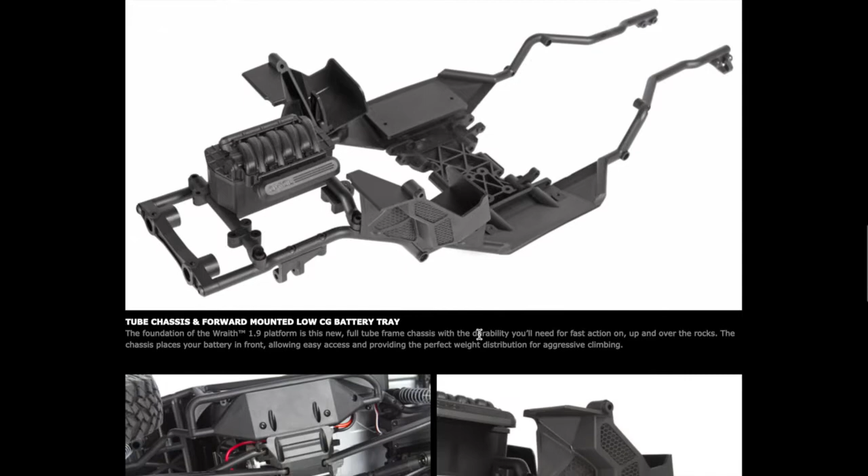How similar that is to the Wraith 2.2, please do have your say on here. I'm going to say something's new and it not be on here, so as I say, I'm not overly familiar with the platform, seen down at JJ Customs. This does appear new though, skid plate and boat sides. Refining a successful Wraith 2.2 design, increase the ground clearance by reducing the size of the skid plate and lower rails. Boat sides.

I guess this fits the meaning on here. So that's going to increase the handling on rough terrain, I guess, by stuff not getting caught as much underneath the car. Protective inner fender wells - are they new to the car? Please do have your say in the comment section below the video.

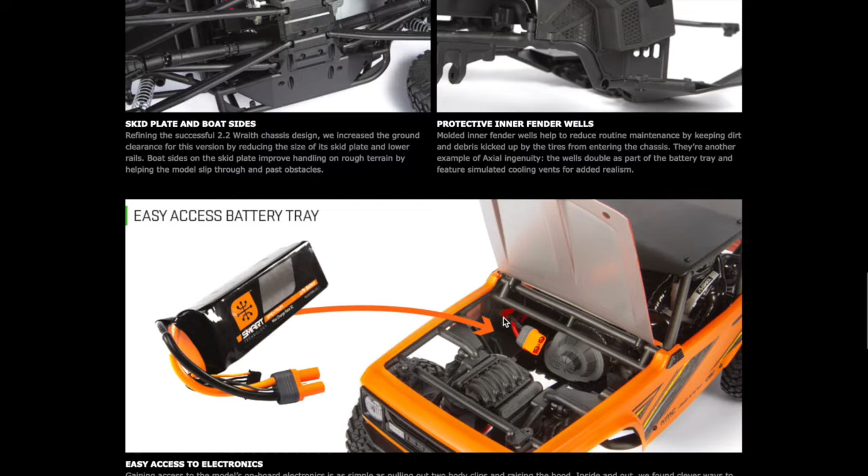What have you got here? Easy access battery tray. Now I have no idea if that was a big problem on the Wraith 2.2, do shout out if it was. Okay, looks quite nice. So for that you can open the hood there just like a real car, and then there we've got a real semi-scale engine in there.

So the battery's going to tuck in there fairly easily, I would guess, from accessing it. It can be a bit of a pain - one of the Axial crawlers I had was a devil of a job to get the battery in and out of there. Adjustable battery tray.

New tray is now relocated lower and further forward for better weight distribution. Can accommodate batteries up to 5000 mAh 3S packs on their site, so I'm guessing you're going to be getting upwards of an hour's crawling with one of those fitted.

Scale accessories, 2 detailed turbochargers, add them under the hood for realism. Okay, and one thing we have got, I did notice straight away in there, is it comes with 5mm LEDs already installed in the front. Moulded plastic grille and radiator, again for adding to realism, and the lights enable you to run at night.

Just scan on down here. Okay, now we've not got beadlock wheels. Some people may have an issue with that at this price point, particularly as lesser cars, or one might think lesser cars, like the Red Cat Gen 8 coming to market straight away with beadlock wheels. Okay, I have no idea at all on these tyres guys. Are these Nitto Trail Grappler tyres any good or not?

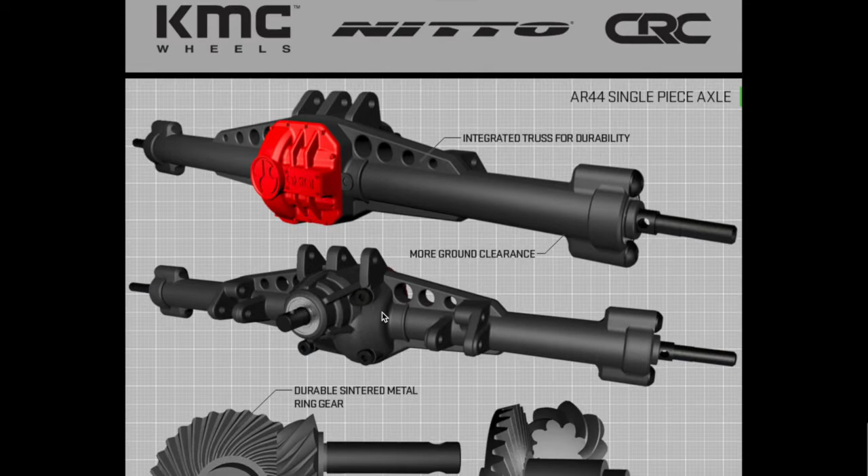AR44 single piece axle. I believe this is common to other models in the Axial range.

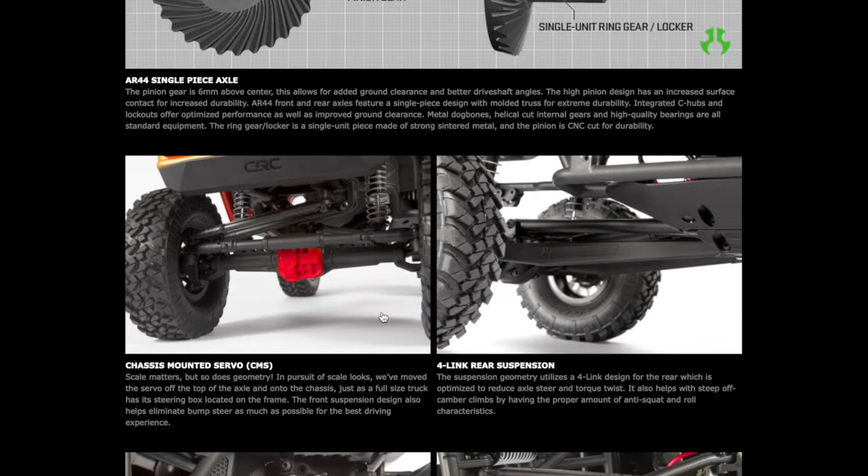Chassis mounted servo. Scale matters, so not just in scale but in geometry. In pursuit of scale looks, they've moved the servo off of the axle and onto the chassis, just as a real life truck would do.

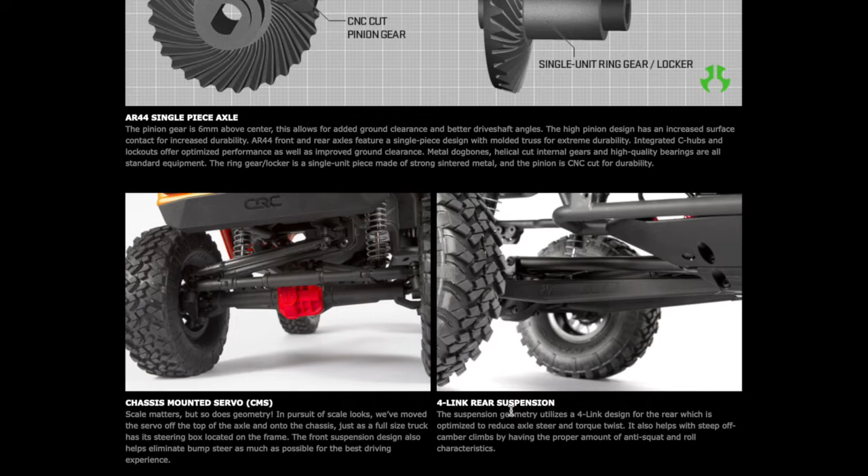Four-link rear suspension, I'm assuming that is fairly similar to the existing Wraith 2.2. Things like the adjustable coilover shocks and these Wildboar driveshafts - anybody out there tell me and others whether these are the same as on the Wraith 2.2.

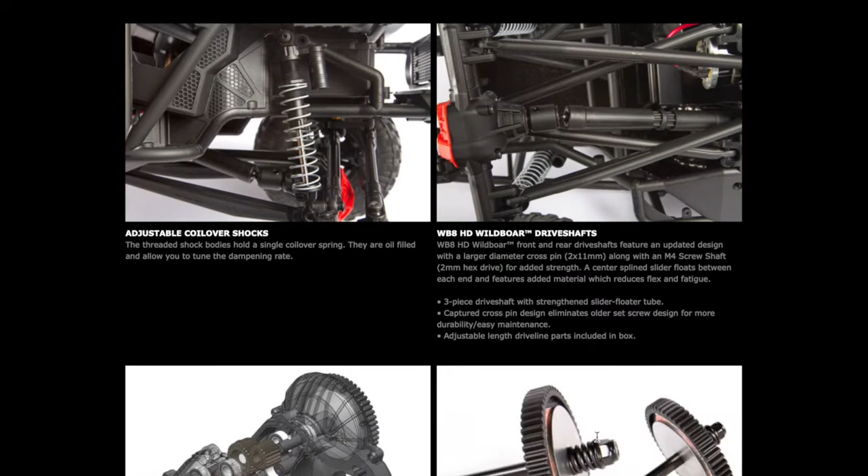Do fire away. Dual slipper clutch, AX10 transmission, I guess that's common with the original SCX10. Final drive ratio is higher.

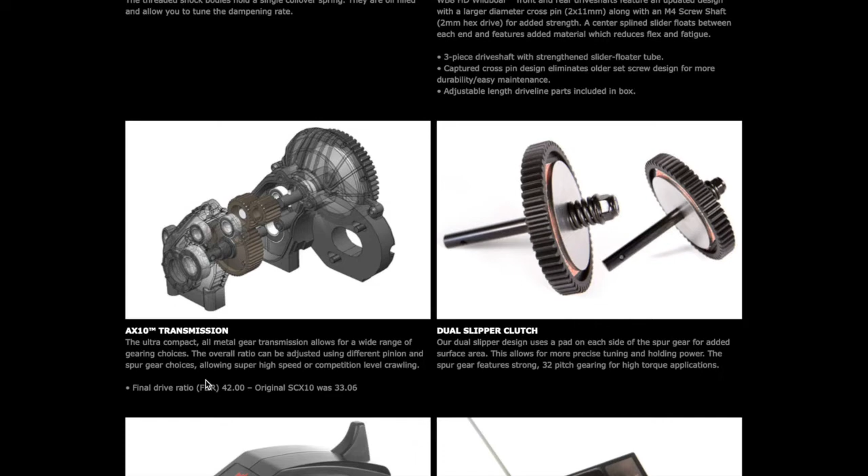Now, I have no idea, does that mean the thing's faster than the SCX10 or is it slower? Do have your say below.

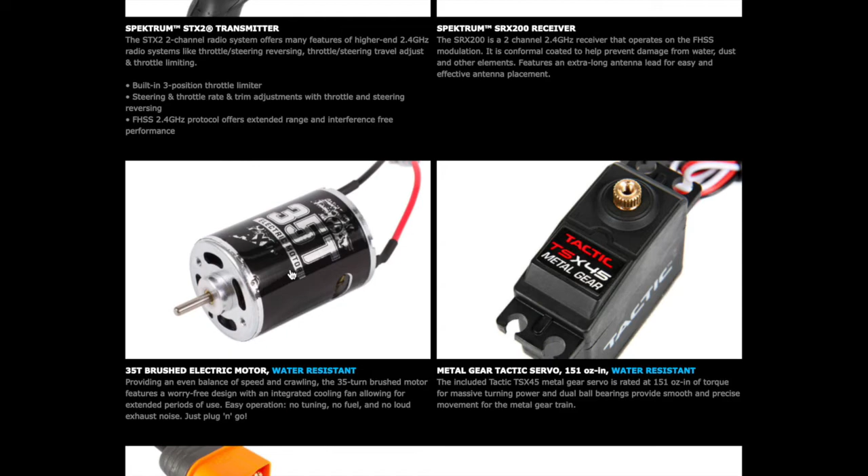A Spektrum transmitter and receiver as the running gear, fairly reliable stuff on here. 35-turn brushed electric motor, so that's going to give you bags of torque with this thing on it.

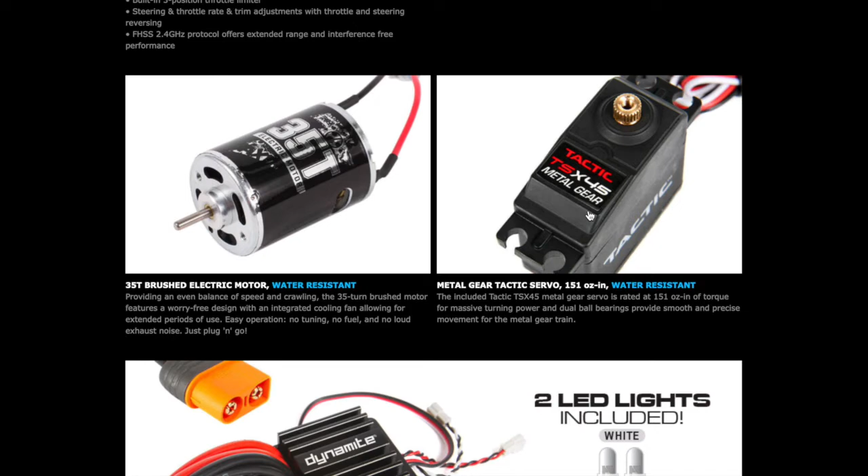Okay, waterproof metal geared servo on it, dual ball bearings. Tactic ones are normally pretty reliable. And I have started taking my radio gear apart and using a conformal coating inside just to be on the safe side. Dynamite AE-5L with drag brake, quite a good ESC.

I have used these on a couple of my older Axial crawlers before, but I've not got any Axial crawlers in my fleet at the minute.

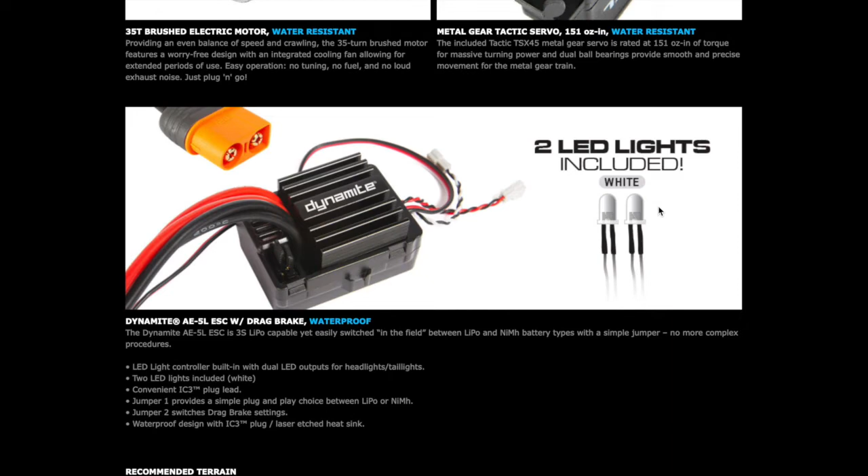So 2 LED lights for powering the lights on the front of the car. Okay, additional items required: battery charger and AA batteries, but it is classed as RTR.

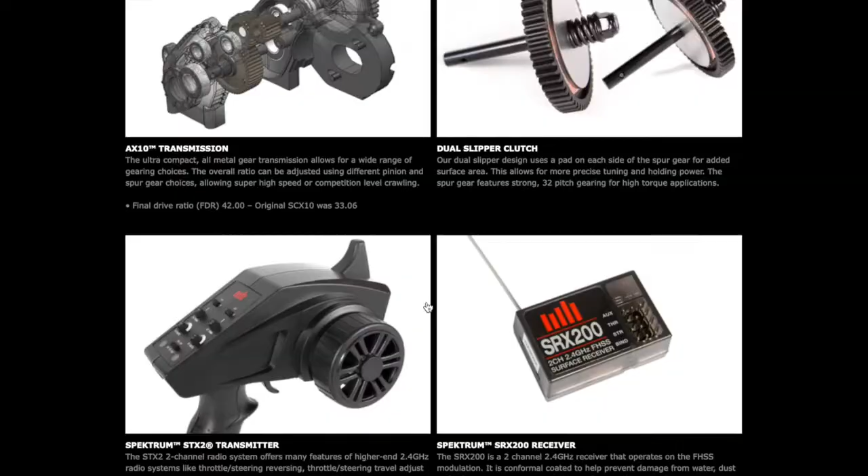So, tell me your first thoughts on it, guys.

Let's click over to the Horizon Hobby site, because on here it will tell you roughly when the next deliveries are going to be. Next shipment, late April. That is the same for both the orange version and the black version.

Pictures on here, look through. As I say, the Horizon Hobby site, Horizon owning Axial, tends to put a lot of effort into the website, so I'd highly recommend checking it out on the Horizon Hobby website there as well.

And undoubtedly somewhere down here, 32 pitch gearing, just purely of interest on there. It will take 2 to 3S LiPo or 5 to 9 cell metal hydride, battery IC3 connector fitted to it.

Everything pretty much included on it, and this is what I was looking for. One thing that Horizon do reasonably well. Check out this video, see what we've got on here. Let me turn that.

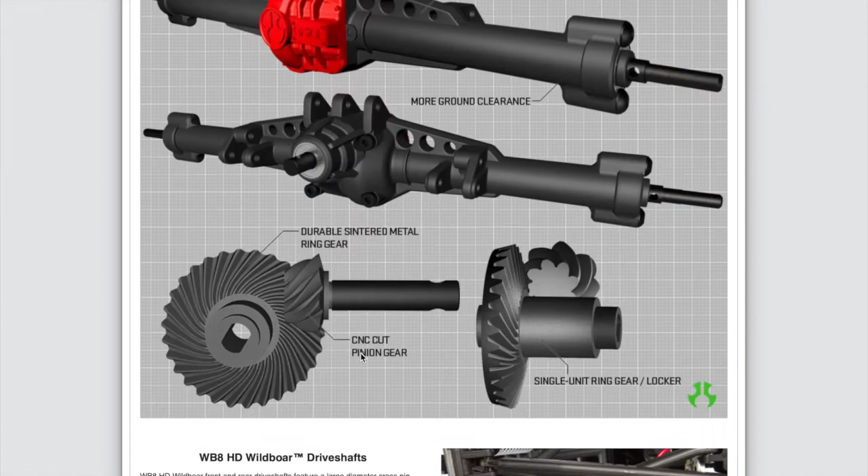The presentation of the stuff on the Horizon Hobby, that's broken down with a little more technical detail on all of the parts we've just covered on there, guys. So I'm sure the Axial Wraith 1.9 ready to run promises to be an absolute cracker.

Anyone got one on order? I'd love to hear from you.

Also, any comments you've got in relation to differences between this and the Wraith 2.2, would love to hear from you. As I say, it's not a platform I'm familiar with, but I know many of you out there will be - you'll be able to tell me and others the differences between this and the existing Wraith. I'm sure we would not be alone in liking to hear those details.

Anyway, guys, I hope you like that quick peek at the Axial Wraith 1.9 4-wheel drive brushed RTR. As I say, available in orange or in black.